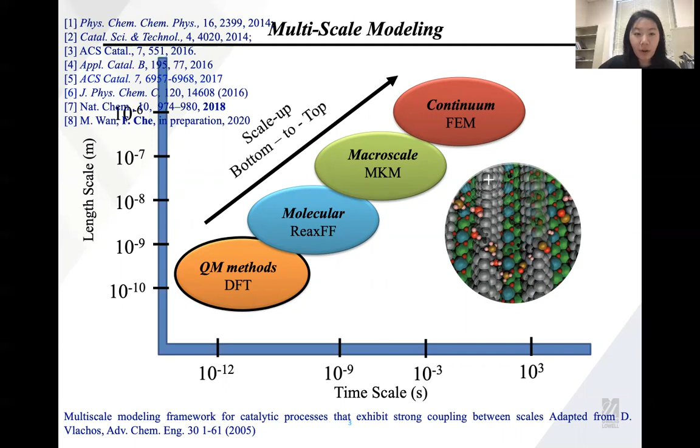For the atomic scale, we mainly use quantum mechanics methods approximated by density functional theory, trying to look at the interactions between the reactants and the surface. We can scale up to molecular level, trying to see what the real catalyst looks like under certain temperature, pressure, or concentration of proton or pH.

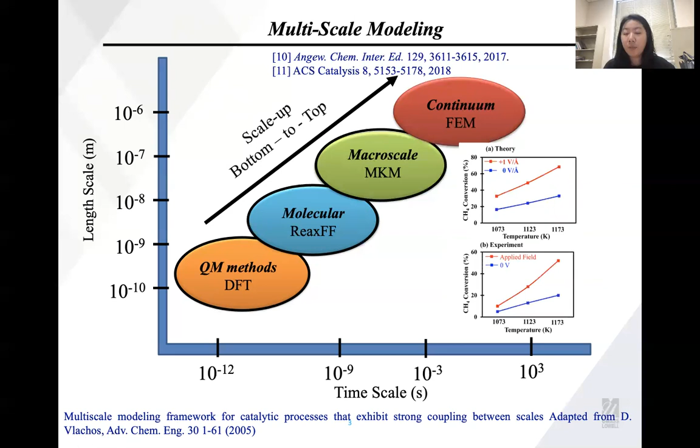We can even scale up to macroscale, mainly using mean field microkinetic models, where we can see a direct quantitative comparison between experiment and theory - what is the yield, what is the selectivity of certain reactions. We can go up to continuum transport models, trying to see the mass transfer.

Heat transfer is approximated by the finite element method, and this is extremely important when your reaction has non-uniform temperature or non-uniform pH in the electrochemical cell. So this is an overview of the multi-scale simulation.

Back to our main presentation regarding microwave heating of packed bed reactor. We will talk about the hotspot formation under the microwave reactor, how this hotspot formation can be treated numerically inside the microwave reactor, as well as how this hotspot formation can assist hard-to-react reactions such as methane steam reforming.

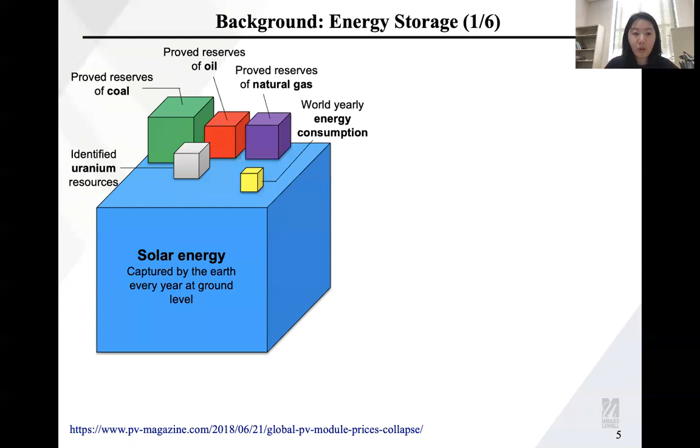Starting with the background: we know that renewable energy derived electricity continues to drop in price, but the challenge is that this renewable electricity is hard and very expensive to store.

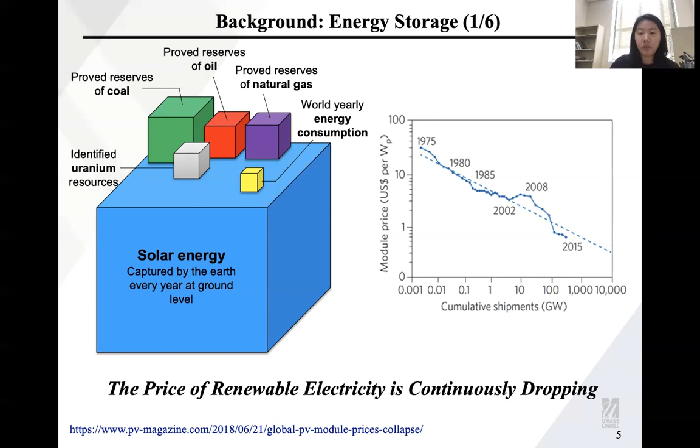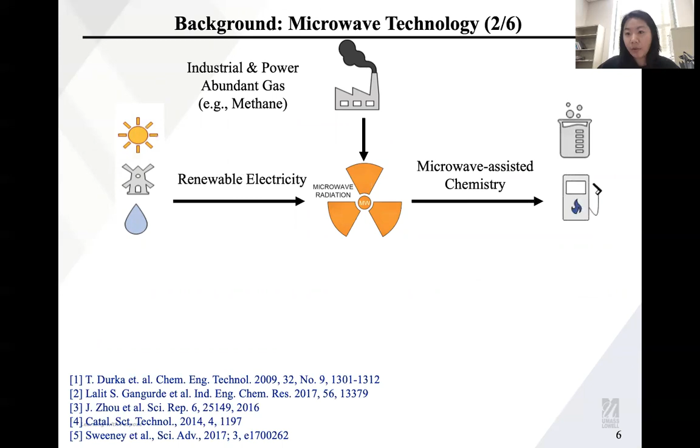To solve this storage issue regarding renewable energy, we can use renewable electricity to activate microwave radiation, and activate hard-to-react molecules such as methane to generate valuable products such as ethylene from methane coupling. If you can have 70% electrical-to-chemical power conversion efficiency, you can reach a profit of $20 billion in the USA and Canada.

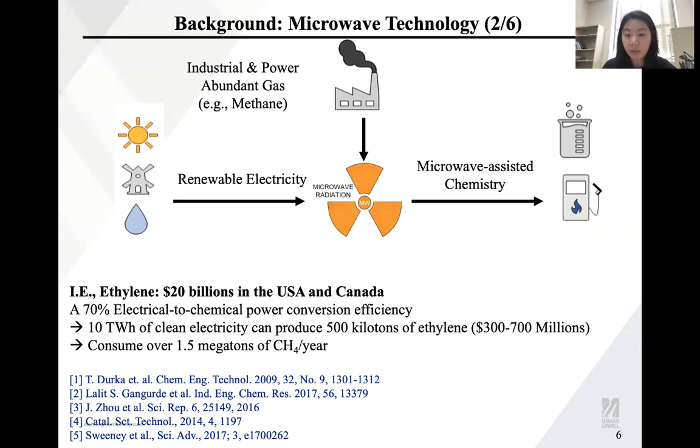Using microwave has its own advantages, such as rapid heating and preferential heating of the material. It can improve energy efficiency. If you do microwave heating on a microwave-high-absorbability material, it can be rapid heating and can improve energy efficiency.

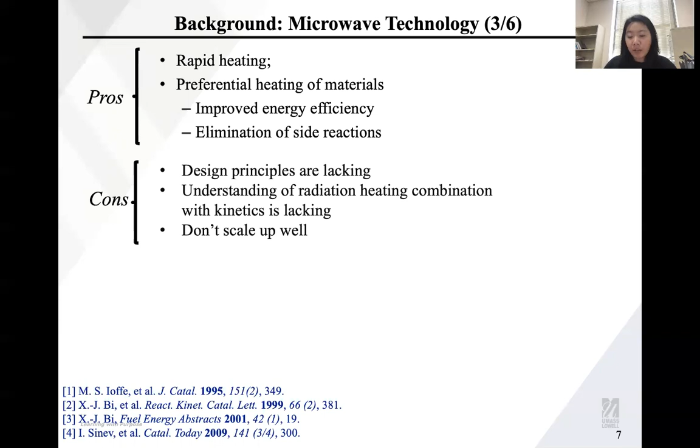At the same time, if you are investigating, for example, gas-solid reactions, your solids can be preferentially heated by the microwave, and your gas phase will stay cold because it couldn't absorb microwave, which eliminates side reactions that happen in the gas phase. So we want to investigate using this advantage of microwave technology for gas-solid heterogeneous catalytic systems.

It also has concerns, because it's really hard to understand microwave radiation heating combined with chemical kinetics, since the mechanism of microwave heating is still lacking. So it's hard to design efficiently how to transfer energy from the microwave to the chemicals, and it's really hard to scale up the microwave reactor as well.

In our presentation, what we're trying to do is understand the role of microwave heating in microwave-assisted gas-solid heterogeneous catalytic reactions from a theoretical point of view. If we can understand it well, then we can better design this microwave reactor.

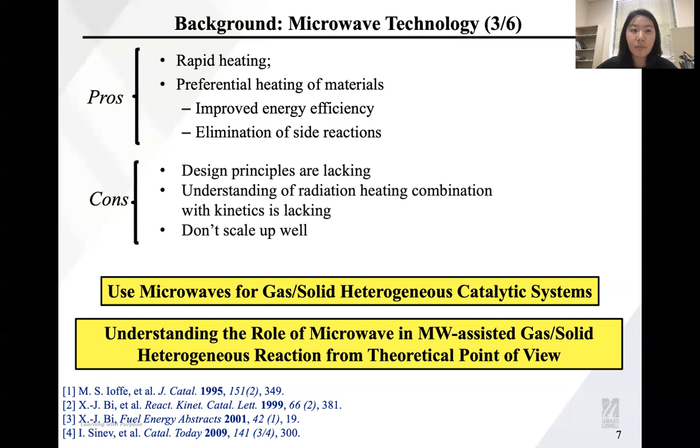One of the interesting things in microwave technology is that you can see a hot spot forming in the connecting necks inside the microwave. If you have particles contacting each other, and this particle has really high microwave absorbability, it can form this intense hotspot.

If this hotspot is near a rich environment of sodium and potassium, it will lead to plasma. Microwave plasma is also one of the hot topics in recent decades, trying to use microwave plasma to efficiently convert hard-to-react molecules to valuable chemicals. This hotspot can also be used for heterogeneous catalysis, for example, catalyzing propanol to acetone over iron oxide at 200 degrees Celsius.

What they found is that under microwave heating, the yield of acetone is significantly enhanced as compared to conventional heating. When you have this hotspot formation inside the iron oxide, that may be the reason leading to that high enhancement of the yield of acetone.

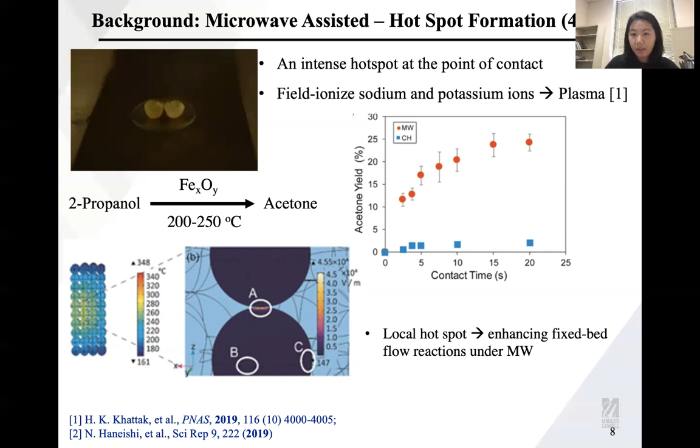So what we are trying to investigate in this project is: what are the dedicated factors that lead to hotspot formation under microwave heating, how this hotspot can enhance the kinetics of heterogeneous catalysis, and is there any numerical treatment that can handle this hotspot formation inside the microwave reactor?

The computational method we use in this research is multi-physics inside COMSOL, approximated by the finite element method. We are simulating 8 particles contacting each other to represent the packed-bed reactor, with microwave input from the top layer to the bottom layer. This is a periodic setup, so you can imagine infinite size in the X and Y directions of the packed-bed reactor.

We are trying to use the finite element method to solve time harmonic electromagnetic wave, which is mainly conducted by the electric field and magnetic field. We are trying to solve the heat transfer inside the microwave reactor, mainly the convection and conduction of heat transfer. The heat source is mainly from the electric field. We also solve the velocity field, the mass transfer, as well as the reaction kinetics, taking as an example methane steam reforming reaction.

Next we will tell about the result on hot spot formation, and what kind of factor can lead to hot spot formation. We did a simple example case using iron oxide, because we know the dielectric constants and material properties of iron oxide. We found that with iron oxide, it can form this hot spot, and as you increase the time, it can maintain a constant 200 degree Celsius difference between the hot spot and the rest area of the catalyst particles.

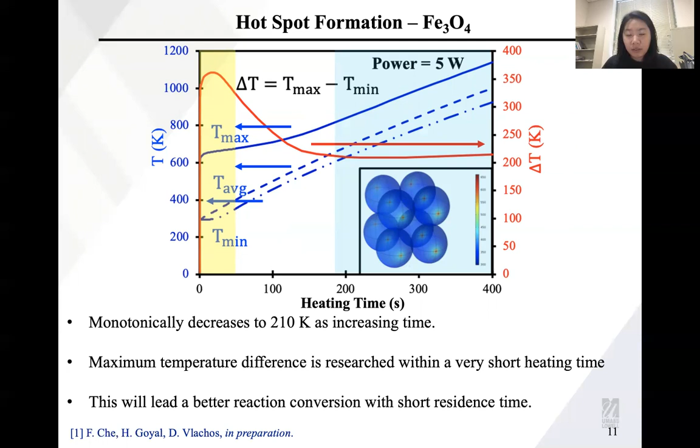It reached the hot spot at the beginning, at 20 seconds after heating, and that is the maximum temperature difference between the hot spot and the rest area of the catalyst particles. You can imagine if your catalyst packed bed has this hot spot formation, it may lead to better conversion because of this hot temperature with short residence time, as compared to conventional heating.

Next we want to know what factor can lead to this hot spot formation. So we tested different parameters such as microwave frequency, microwave power, the heating time of the microwave, and the materials you are heating, such as the dielectric constant, the thermal conductivity, the density, and the heat capacity. We had the question of which parameter can dictate the hot spot formation.

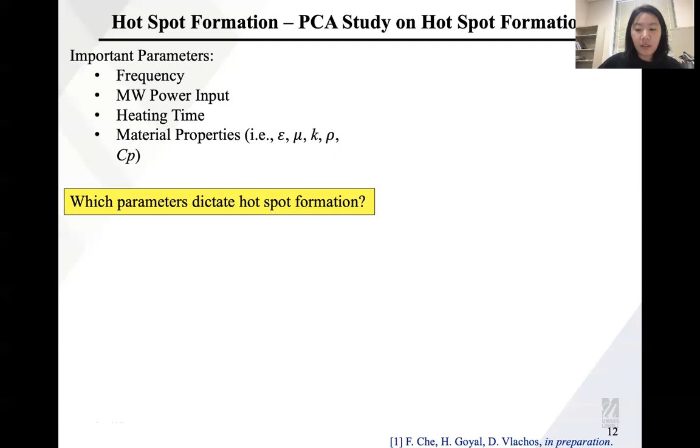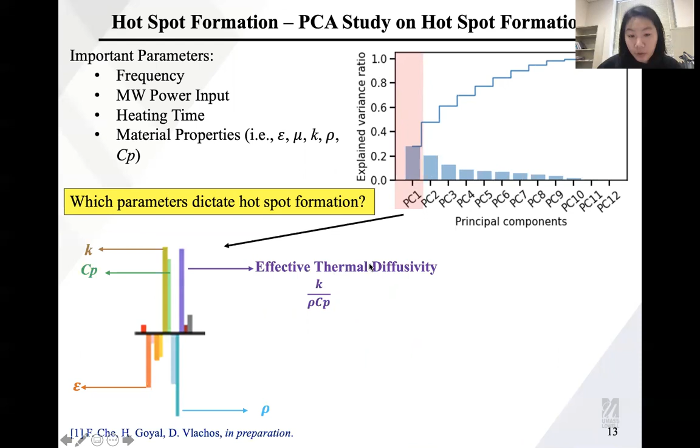We did principal component analysis using all the data we generated from COMSOL Multiphysics. From PCA, you know PC1 should be the most important dominant factor dictating the hot spot formation. So we further zoomed in on our PC1. What is it? We found that the effective thermal diffusivity is the dominant factor, which is related to the heat capacity, the thermal conductivity, and the density of the material.

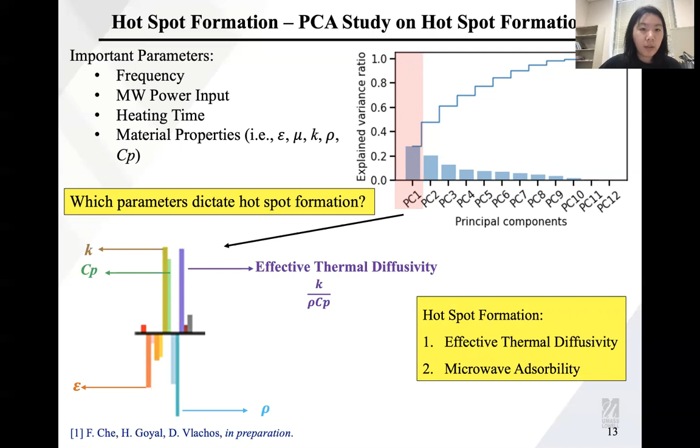We also found another important factor, which is the dielectric constant of the iron oxide. So our current conclusion regarding hot spot formation is that we need effective thermal diffusivity to be one of the dominant factors leading to hot spot formation, as well as the particle needing microwave absorbability. With this conclusion, we tried more materials beyond iron oxide for hot spot formation.

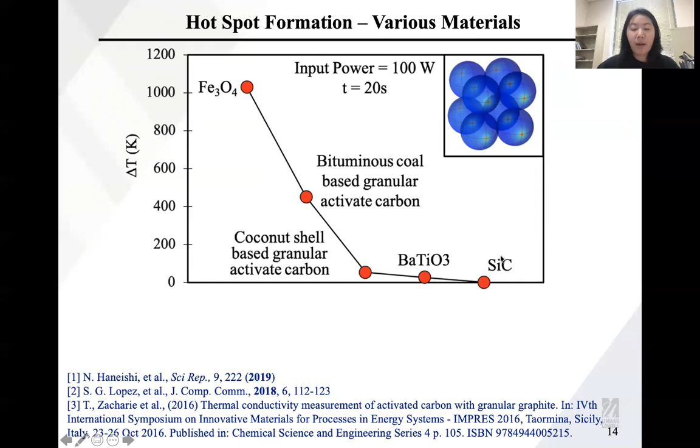This included the materials iron oxide, activated carbon, perovskite, and silicon carbide. We found that when a material has high microwave absorbability and low thermal conductivity, that material can lead to a significant hot spot. But when you have really high thermal conductivity, even though microwave absorbability is high, this hot spot won't form, because as soon as the hot spot forms, it will distribute the temperature to the rest of the catalyst. So silicon carbide doesn't have hot spot formation.

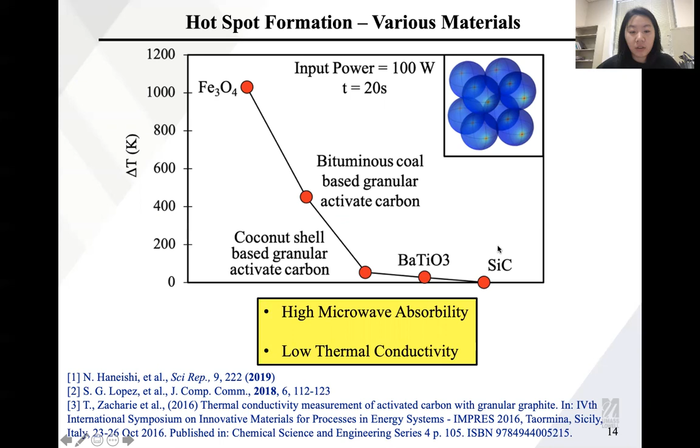Next we want to know what role this hot spot plays in heterogeneous catalysis, mainly gas-solid heterogeneous catalysis. We use a study case, the methane steam reforming reaction. Why this case? Because 95% of the hydrogen in the United States is generated from this methane steam reforming reaction, and the hydrogen can be used for ammonia synthesis for agriculture.

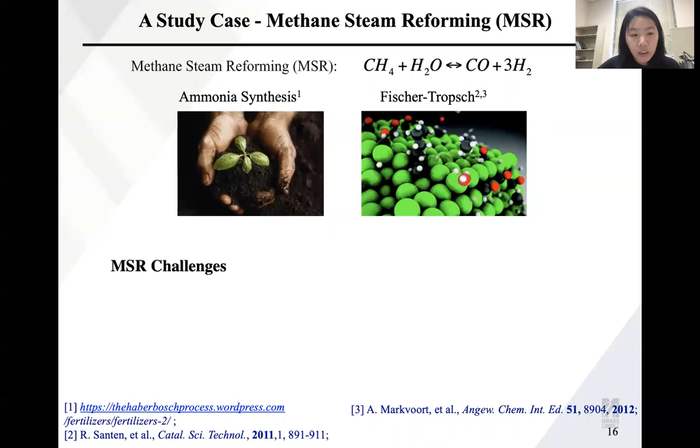The syngas generated from methane steam reforming reaction can directly input into the Fischer-Tropsch reaction to generate long-chain hydrocarbons. This reaction itself is very important because it has broad application in industry. There are also challenges with methane steam reforming and conventional heating, because the high temperature requirement means this reaction always has low energy efficiency in industrial application.

Also, because of the high temperature requirement inside the methane steam reforming reaction, if you have conventional heating, everything is heated uniformly, and you will have very high gas phase temperature that leads to side reactions, specifically coke formation. After coke forms, it will deactivate your catalyst, so the stability of this reaction is also not good in industrial application.

We want to use microwave technology to enhance this methane steam reforming reaction. So we have our catalyst with a core and shell structure. The core will be made of a material with good microwave absorbability performance.

It will heat rapidly in the microwave and selectively, solving the challenge of the high temperature requirement of methane steam reforming, as well as improving energy efficiency, because it heats rapidly and preferentially for the materials you want to heat up. It won't heat the gas phase, so the gas phase stays cold, eliminating the side reactions caused by gas phase reactions. That solves the methane steam reforming challenges listed here.

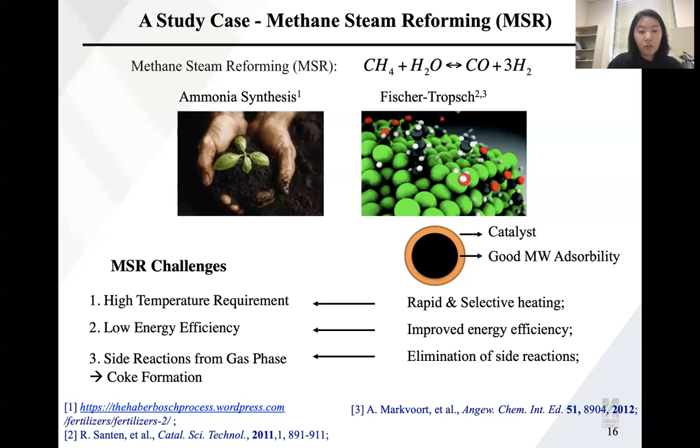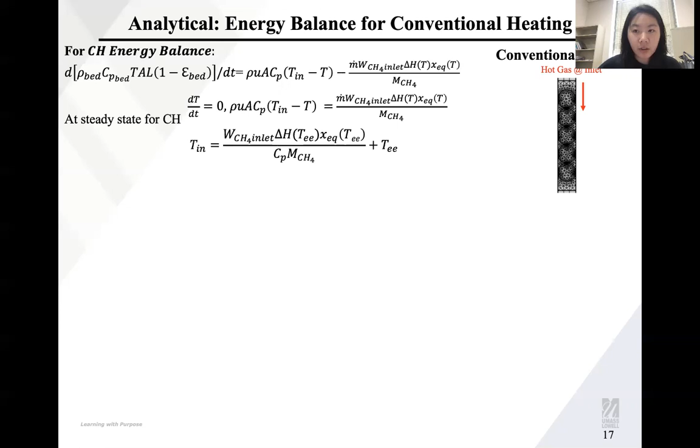Let's do some analysis for comparison between conventional heating and microwave heating. First we did the energy balance for the methane steam reforming reactions. We have our catalyst represented by these 5 particles contacted to each other in these reactors. We have hot gas coming from the top and gas input from the top to the bottom. We calculate what temperature is required for the hot gas to reach equilibrium.

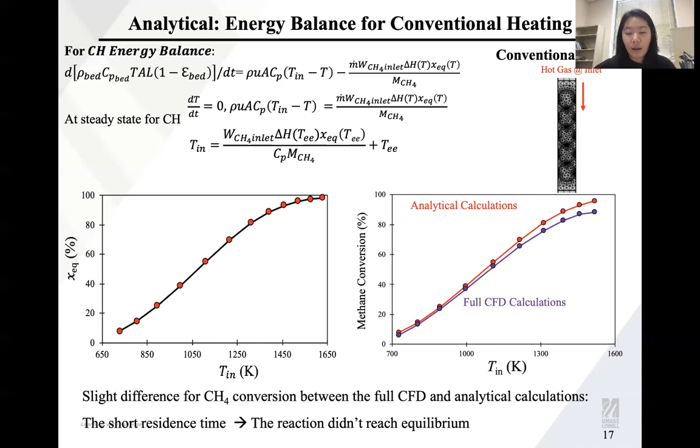We compare this with our full computational fluid dynamics simulation in Comsol Multiphysics. We found it largely agrees with our analytical calculations, just a slight difference. This difference can be because the residence time of this catalyst bed is not long enough to fully finish the methane steam reforming reaction in this reactor.

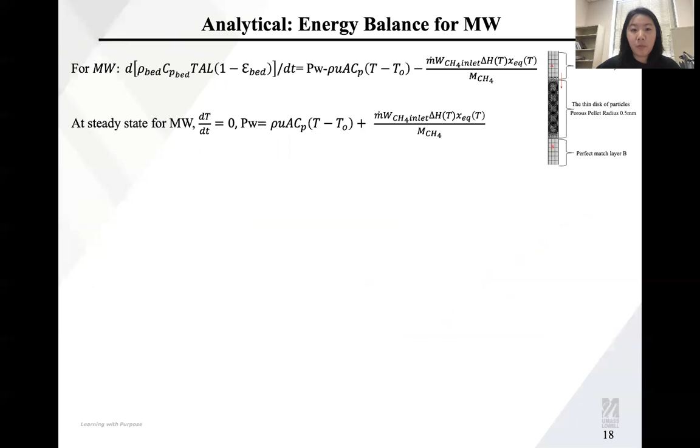We did a similar analysis for the microwave heating. We calculate the energy balance, what kind of power input can drive this methane steam reforming reaction. We found that as we analytically solve this microwave heating at certain equilibrium conversion, that gives us the power input for each flow rate.

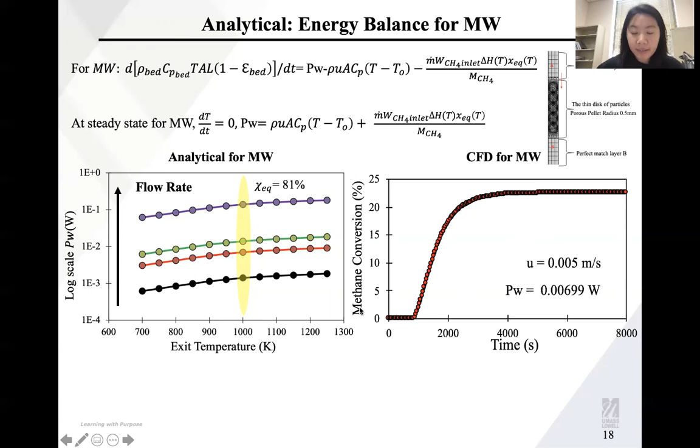We also calculate at a certain flow rate, which is this point, the computational fluid dynamics gave us much lower methane conversion compared to the analytical simulations. That is because the majority of the microwave wasn't absorbed by our catalyst bed due to the current geometry setup. Only 31% of the microwave was absorbed by the particles.

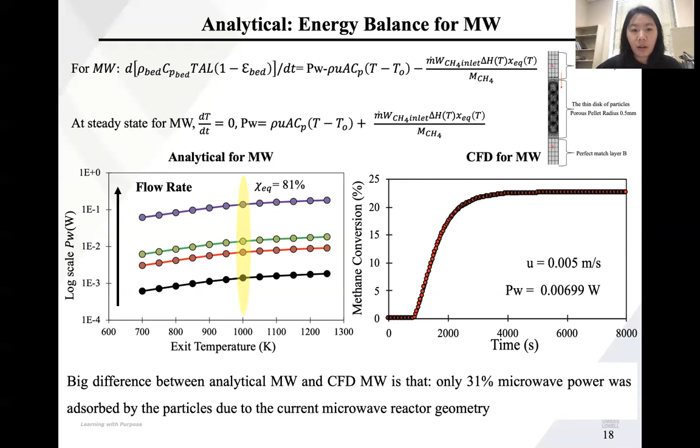This gave us the hint that we need to design our microwave reactor, design our microwave packed bed particles, so that it can fully absorb the microwave power and reach even higher equilibrium compared to conventional heating.

We further tuned the flow rate, basically tuning the residence time of the microwave reactor as well as the conventional heating. We found that as we increase the flow rate for the microwave heating, the methane conversion actually increases. That is quite different from what we'd expect from kinetics, because as we increase the flow rate, the residence time decreases, so the methane conversion should decrease.

From this result, we have a preliminary conclusion that with a higher flow rate and shorter residence time, the microwave heating can potentially reach higher conversion compared to the conventional heating case.

This gives us a hint that when we design our microwave reactor, maybe we can have a shorter bed and achieve better energy efficiency compared to conventional heating.

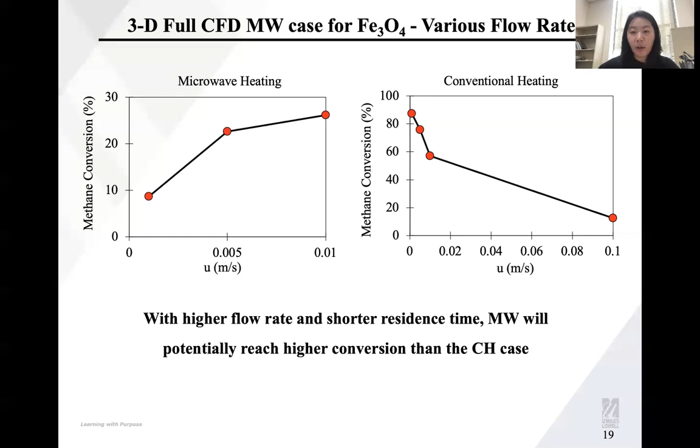Then let's go to the last part. When you have contacting particles inside your reactor, it's really hard to mesh for your simulations. The mesh will give you a really hard time converging. So there are some numerical treatments for the contacting parts in packed bed reactors under conventional heating.

Researchers add a bridge between particles, and they found that when the bridge dimension relative to the particle dimension is around 0.1, the bridge method can treat the contacting particle convergence issues, while giving similar accuracy compared to having the particles directly touching each other.

Similarly, when the particles are touching each other, it gives us a hard time converging in the microwave reactor as well. Can we use the same bridge treatment to treat the interparticle contact for our microwave reactor?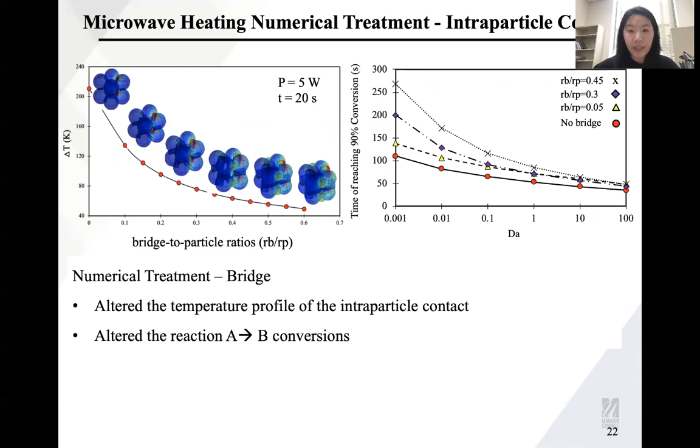So we need to think of a better way for this numerical treatment of the bridge, how we can tune this bridge material so that we won't change the temperature profile, and at the same time won't change the kinetics of the reactions under microwave heating.

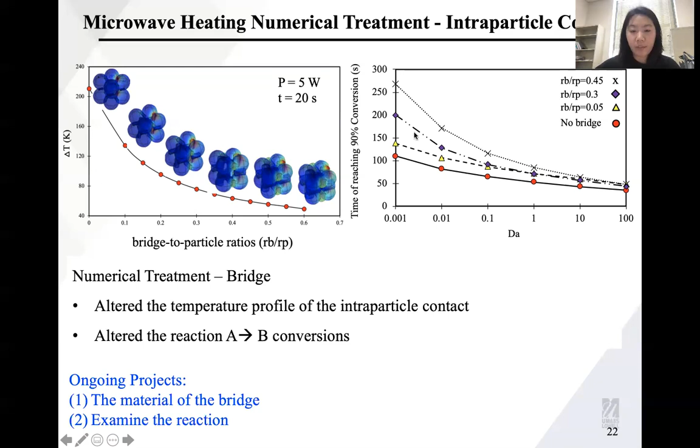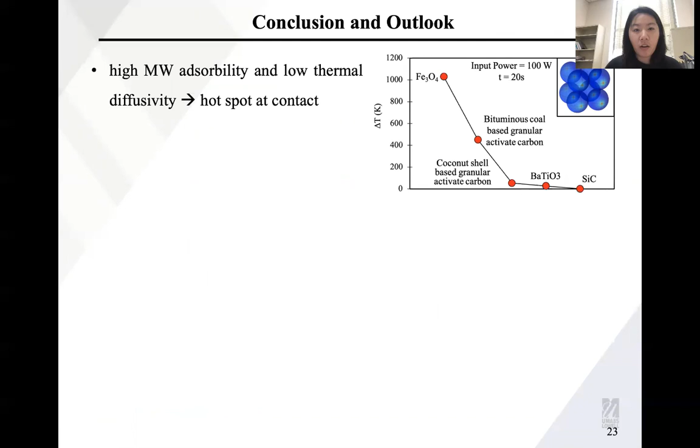In conclusion, we know the main factors leading to hot spot formation are the microwave absorbability as well as the thermal diffusivity. And we know that we need a better way to numerically treat the bridge.

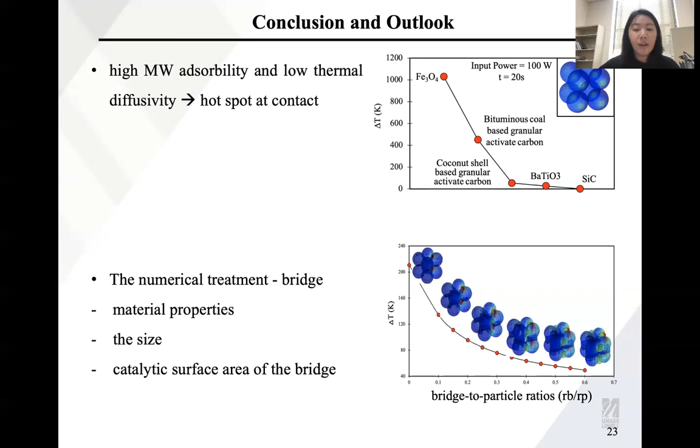For example, how to tune the materials of the bridge, how to tune the size of the bridge, and how we treat the catalytic surface area of the bridge, so that we can keep the same temperature profile and the same kinetics as when we use the bridge treatment for touching particles.

We also have the preliminary conclusion that with higher flow rate and shorter residence time, the microwave can reach higher conversion than the conventional heating case.

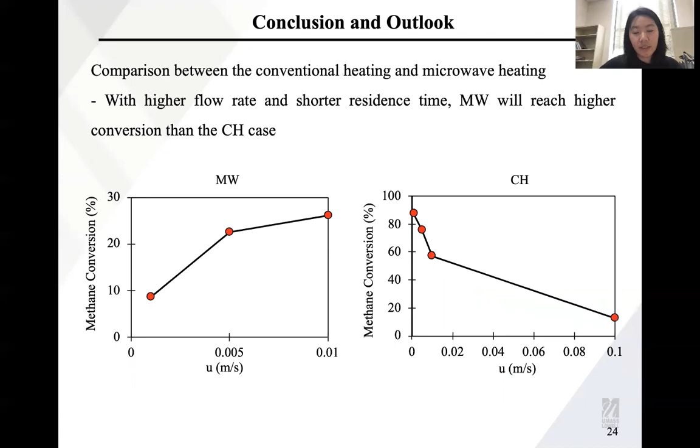Currently our group is mainly focusing on heterogeneous catalysis, including electrocatalysis, microwave catalysis, as well as thermal field-effect, field-induced heterogeneous catalysis using multi-scale simulations.